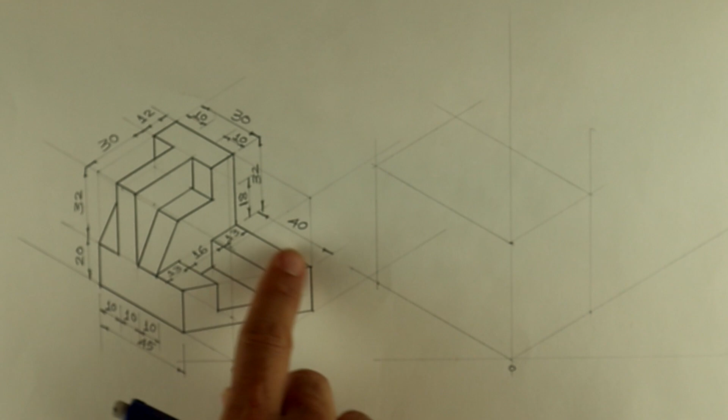Welcome to Technical Drawing. Today we are going to solve this sum in copy isometric. Now if you see this sum, in this the length is 70, height is 52 and width is 42. The longer portion is length. If you see this, it is 70, 40 plus 30. So 70 will come on left, right we will have 42 and height we will have 52.

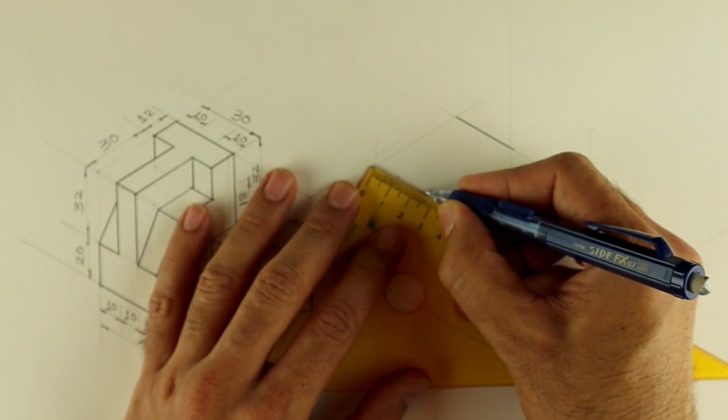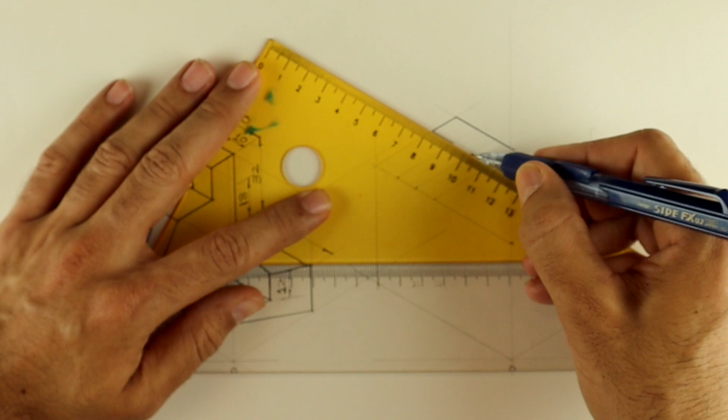So first we will start with this 30. So we'll mark 10, 10, 10. See, this T shape we need to draw. So from bottom also I'll mark 10, 10, 10 and I will extend. This is 12. See, you will get this T shape.

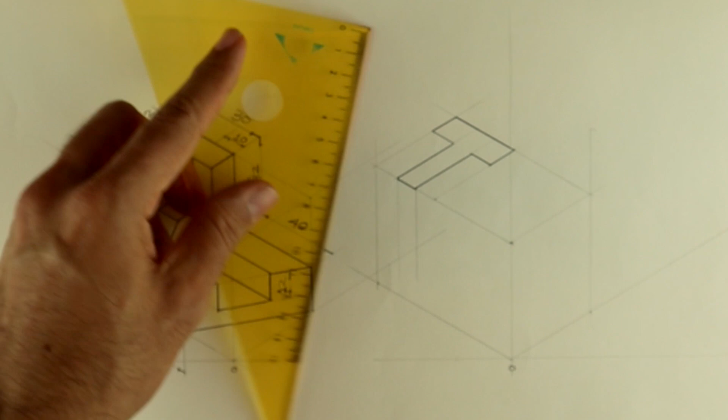After that, see this height is 20. You extend this. This is 45. See, this is 10.

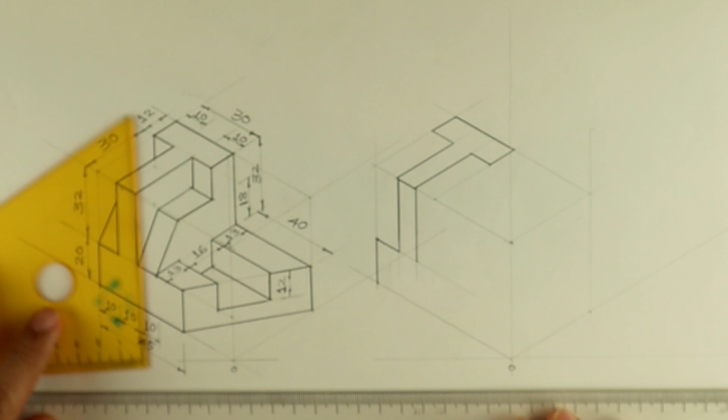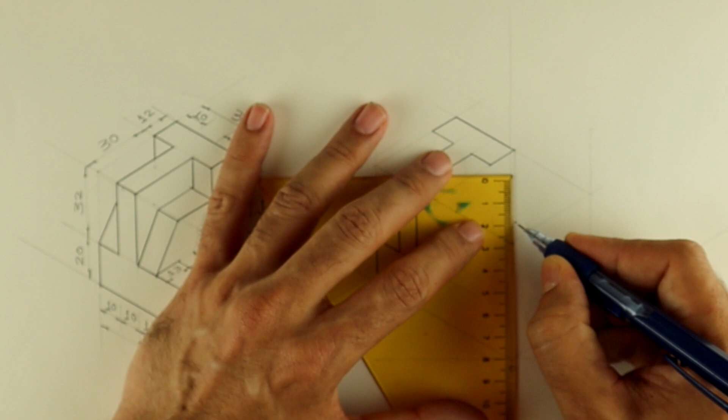This height 32 minus 18, 14. So we can take 14. This I'll take 32 down. And 18 up.

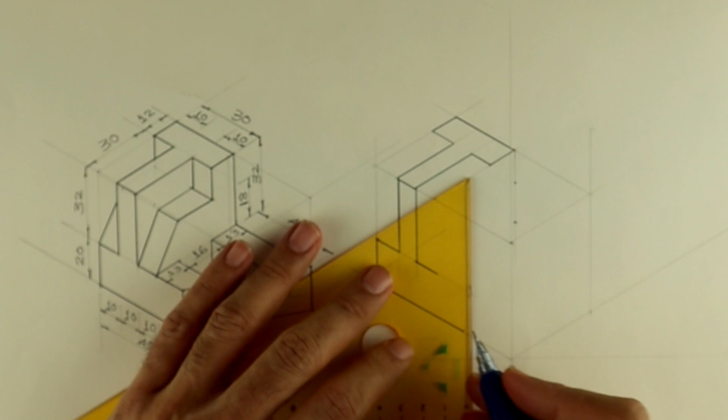We can draw this part also first. This is given 45. See this 45. Go up. Here also you go up by 20. Join this to this. This is how it will come.

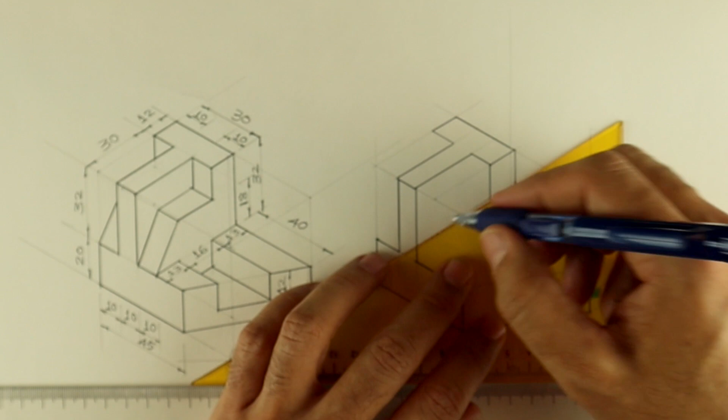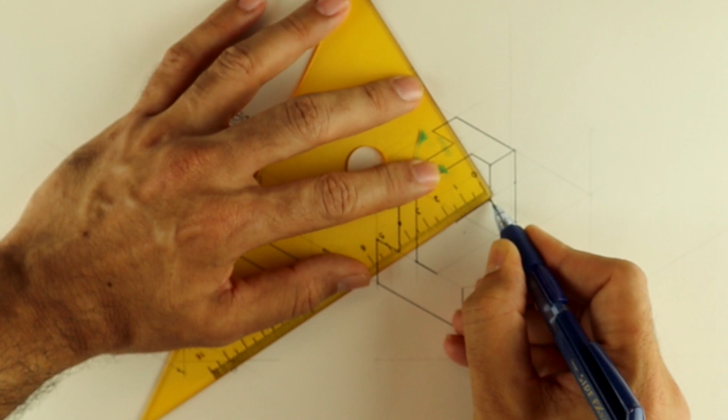Then this we can do it dark. This 14, 18 down. From down it is 18, from up it is 14. This is 14. Then this length is 18. It is not given. It is 18. So we'll take 18. And we'll join this.

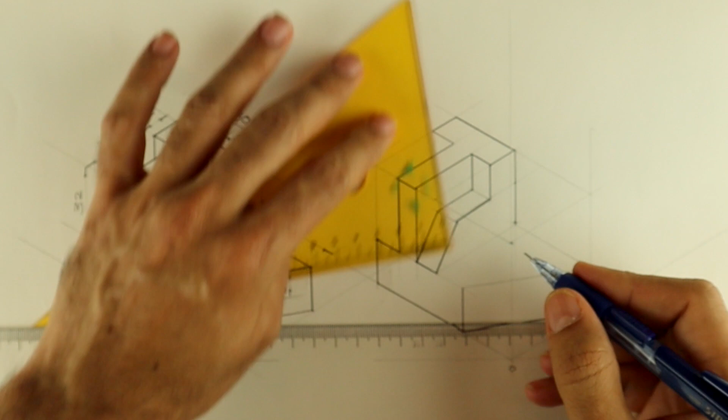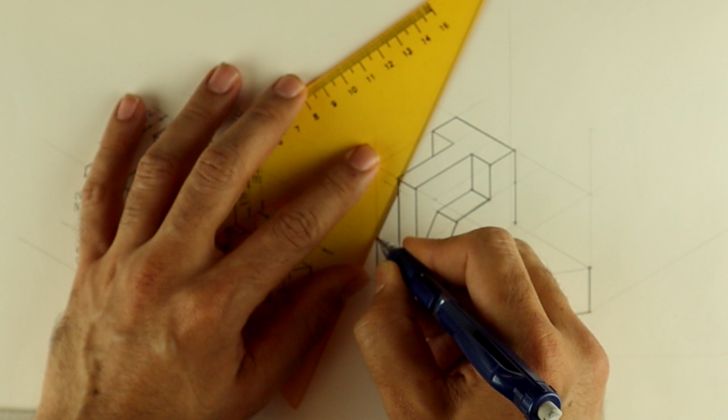Same way you take this behind by 10. This also behind by 10. This goes down. So we are assuming that behind also it will be same. So I'm taking 10, 10, 10 and same kind of a slope. If it is different, then they will mention. If it is not, then we have to assume it to be same.

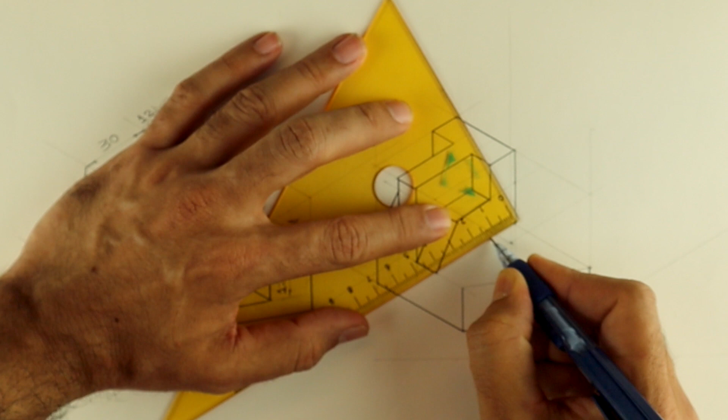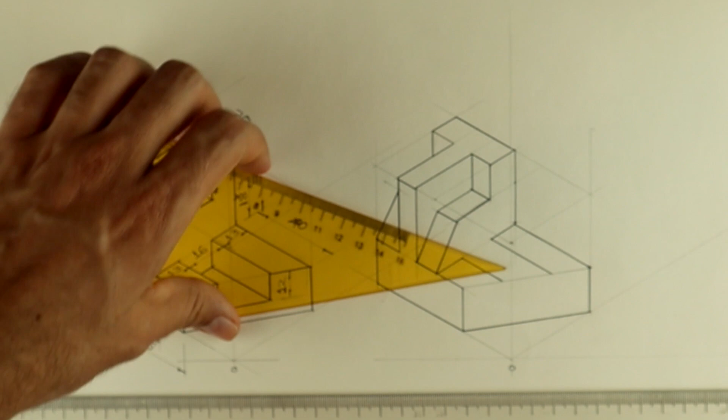Now we'll draw this part 13, 16, 13. And then we'll extend the line on both the sides. Then we'll draw a vertical line which is 12. So I'm taking 12, 12 on both the sides and I'm joining it.

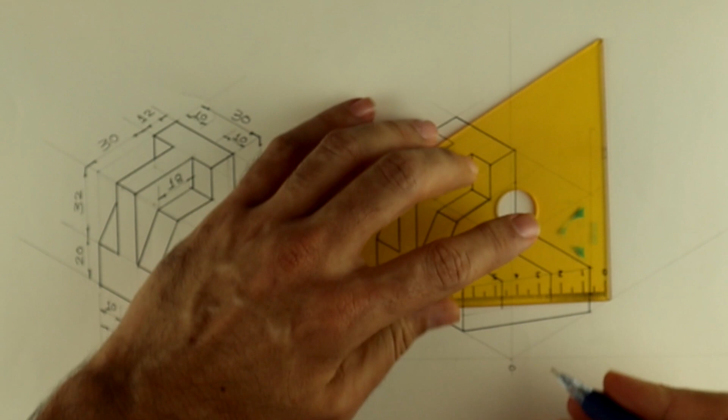After that, you take this line vertical. Draw a line from here and line from here. So you'll get that depth. This way.

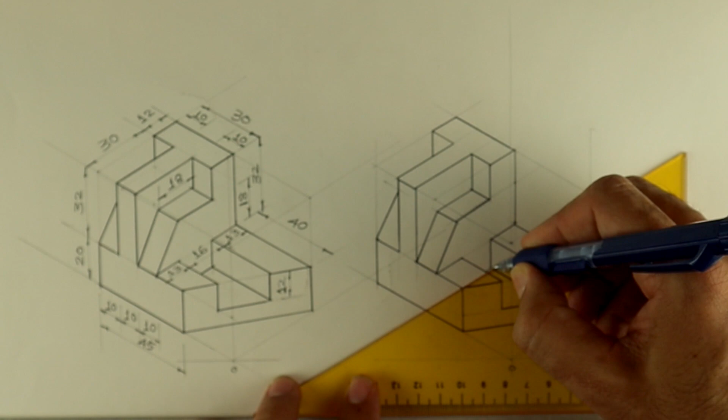So we are done with this sum. What we can do is labeling and dimensioning, that is 30-30 degree, length, width and height. And then we are done with this copy isometric.